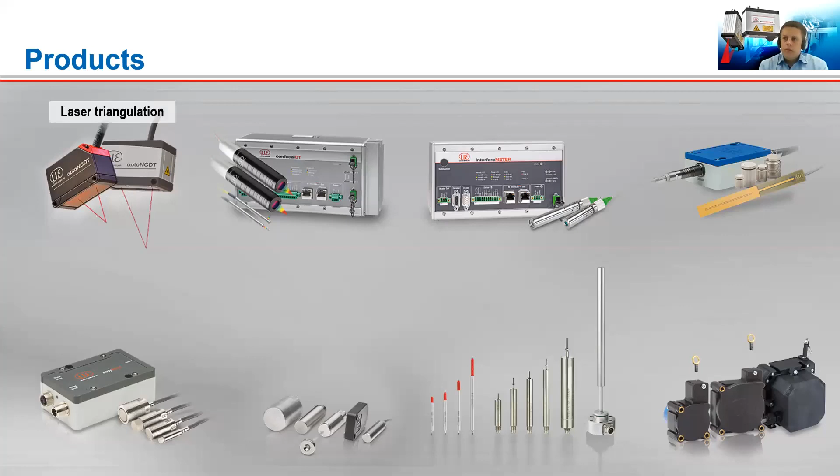First of all, the general product portfolio is not just about 2D, 3D laser profile scanners, but also about different kinds of applications and sensor technologies based on, for example, laser triangulation. Today we will talk about the 2D laser triangulation sensors. We also have them in one dimension.

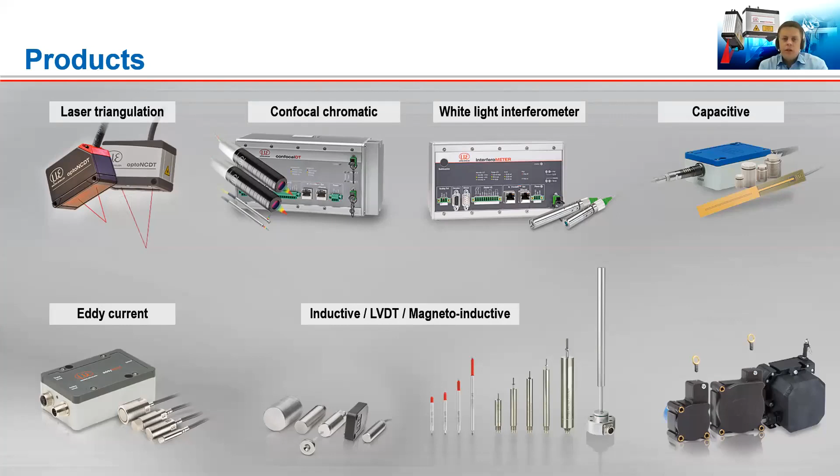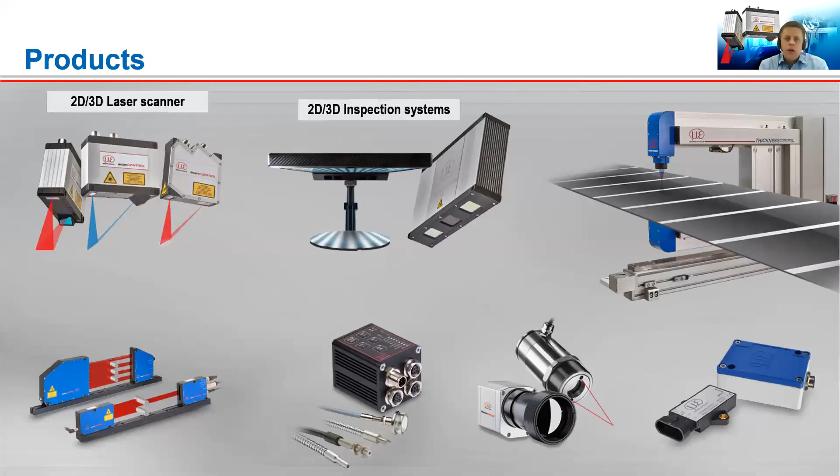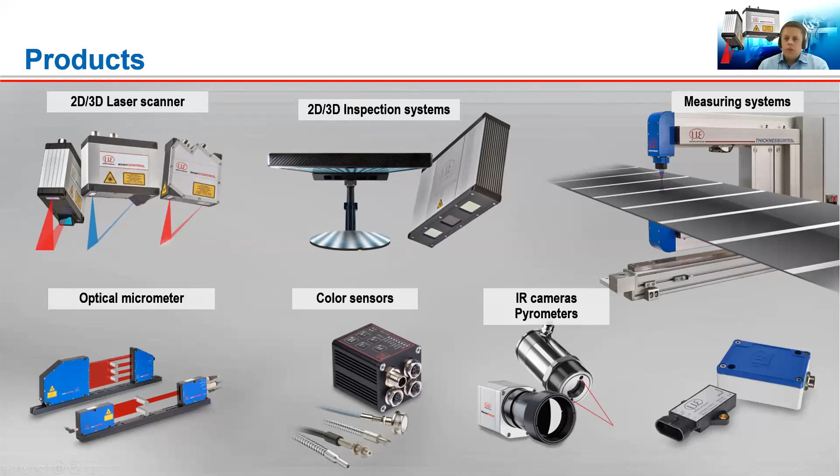Confocal chromatic sensor systems, white light interferometers, capacitive sensors, eddy current sensors, inductive LVDT magnetoinductive sensors, draw wire sensors, and also the area we will talk about today: 2D, 3D laser profile sensors, 2D, 3D inspection systems, measuring systems, optical micrometers, color sensors, temperature sensors. Mainly, today we will only talk about 2D, 3D laser profile sensors.

In general, due to the variety of sensor technology in our portfolio, we also have a lot of different applications and industries we are addressing, from automotive with big German car manufacturers to aerospace, so Airbus, Boeing, Bombardier. Automation, heavy industries, semiconductor industries, and smartphone industries. So in general, a huge variety. We are not just specialized on one industry sector, but different sectors.

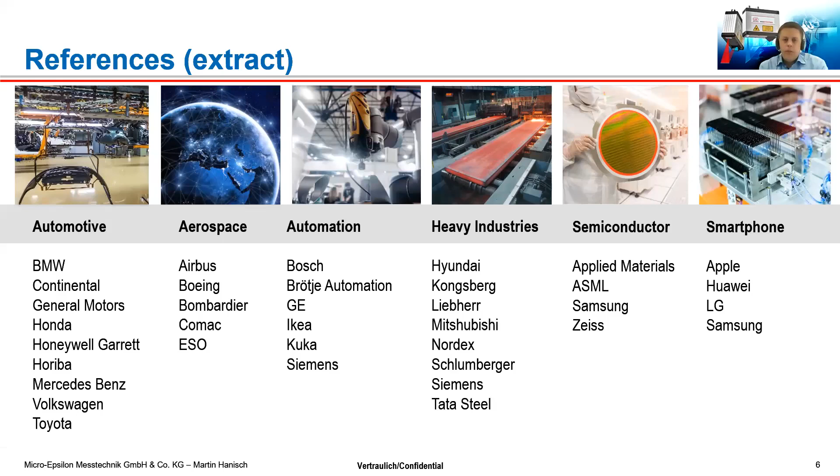And of course, we are also working pretty closely with universities, research institutes, and so on. We are also ISO 9001 certified. So it is mandatory for us to show all the documents, processes and products in our ERP system, so that it's easy to have an overview of the projects.

Besides that, we can develop according to special requirements like ATEX, ultra-high vacuum, aviation, and so on. Overall, we are pretty engineer driven, and this is a benefit in our case, since in most cases the sales guys are also engineers.

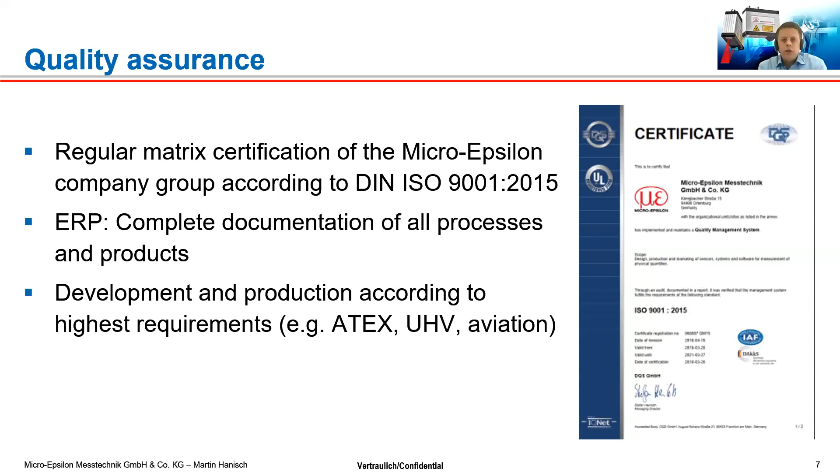First, I will start with some general applications that are solved with Micro-Epsilon sensors. Later on, we will focus on the laser profile scanners. General applications are, for example, the position measurement for the world's largest mirror telescope, the E-ELT. In this case, the mirrors need to be adjusted with a resolution in the nanometer range, so that the mirrors are focusing on the detection area. And of course, they need to be extremely temperature stable.

Besides that, with the inductive sensors, measurements are continuous and non-contact, for example with very robust sensors that are resistant against oil, diesel, pressure, temperature, corrosion. The bearing gap in marine diesel engines, for example, on ships.

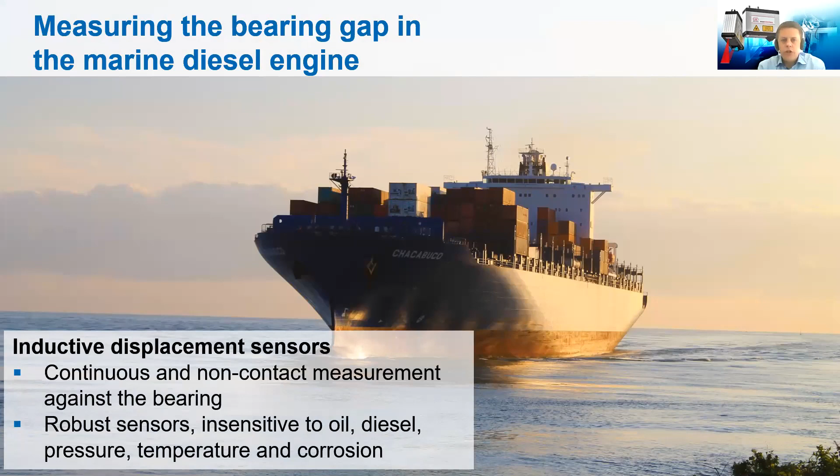Or, for example, condition monitoring for turbines and heavy electrical equipment with eddy current and capacitive sensors. That means these sensors can be built into the bearing directly to monitor the run-out of the turbine. They are pretty resistant against magnetic fields and, depending on the technology, also against oil, etc.

Another application, I think fully equipped with our sensors in the meantime, is the flap position and door lock control for the Airbus A350. This is really a serial sensor, and due to that, we also have the approval for aviation sensors with their special needs and special certification. This is also done by us.

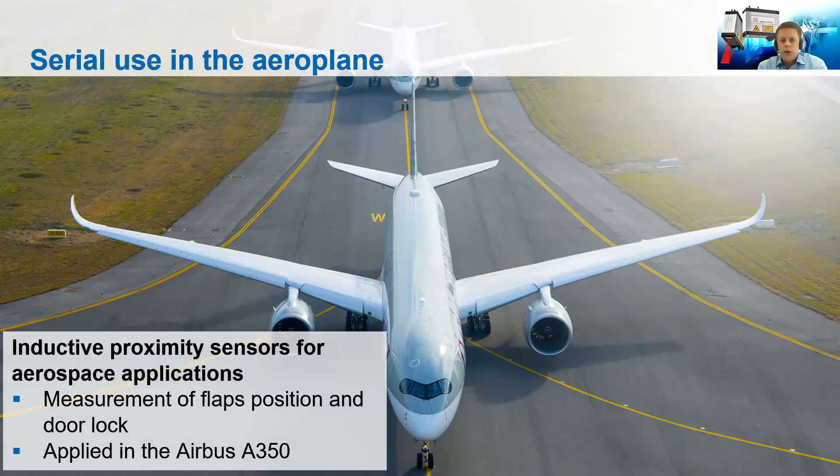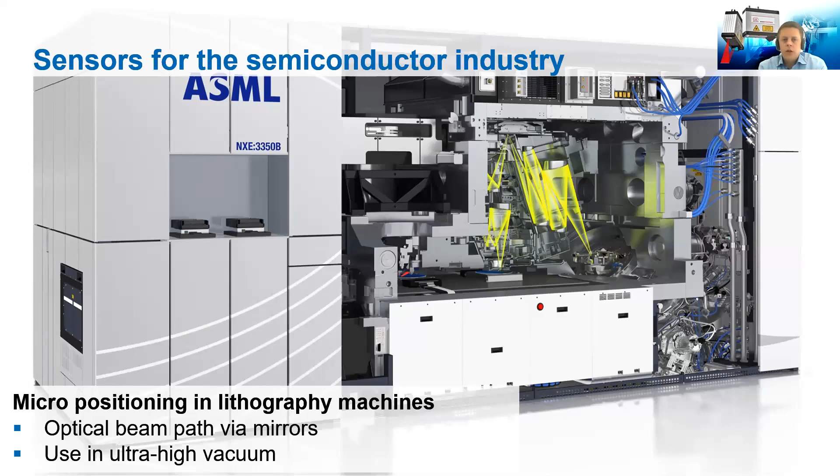That was mainly the general overview for the beginning. Now I will focus on the main topic for today, which is scanCONTROL. This is our name for so-called laser line triangulation sensors. Laser line triangulation is a two-dimensional measurement. So you're not just measuring one distance, you're measuring several distances depending on the type of sensor.

The sensors shown here have an X resolution of up to 2048 points along the X-axis. So you can measure about 2048 distances. They can be used from simple setups up to very complex systems, but I will show you applications a little bit later.

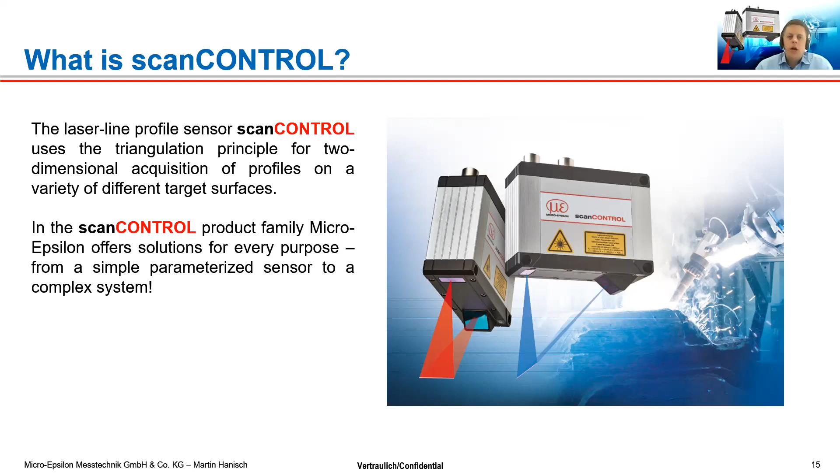A little bit of physics to begin. As I told you already, we are talking about laser line triangulation. A complex word, but in general, not that hard to understand.

You will have a laser diode. Laser diodes are only point light sources. Then you will have an optics, the laser optics, that will create out of the laser point a laser line. This laser line will be emitted towards the surface.

On the surface you will get a reflection. The diffuse part of the reflection will be going through the optical path, through the receiver optics, through a mirror, then on a detection matrix.

So here you can see this will be the laser line on the target. It is a pretty easy target, more or less just a step. And this is how it will look like in raw data, the pixels directly on the matrix. Internally, it can be calculated that way, that you will have a calibration from the production side already. And with that calibration, you will get calibrated measurement results in X and Z.

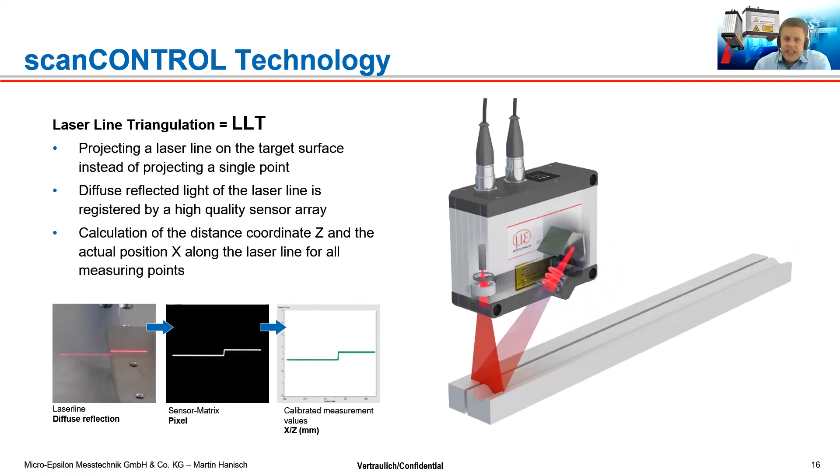Mainly we will have two classifications. One will be the compact classification as a group, let's say in that way. And the other one will be the smart classification. Compact will be to implement that into your own software environment, so you can code the software on your own. You're absolutely free to do whatever you want.

Smart sensors will be mainly used, for example, in the industrial environment, in the machine itself. You're not really interested in the raw data, but you're just interested, for example, in step heights, and this can be done with the so-called smart sensors.

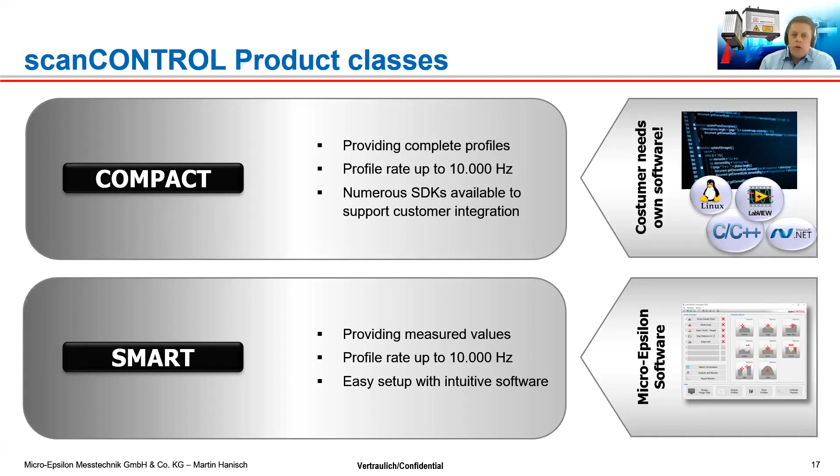Just to give you a general overview of what we will have, what will be there or not. This is more or less the current overview of our measuring ranges. You can see we have measuring range from 10 to 8 millimeters up to 200 to 300 millimeters. So in this range we are working, very small and very accurate, into more or less rougher environments, for example also to have a bigger offset in case of harsh environment.

Because in this case, also with harsh environment, it will always be good to have there, for example, a bigger offset just to get away from the target.

Mainly most of our sensors are available in red and in blue. This has something to do with the reflectivity properties of the sensors, because more or less this is always depending on what kind of material you have. In some cases red might be better, in other cases blue might be better. But this is something we can of course discuss directly on your topic. Will be no problem.

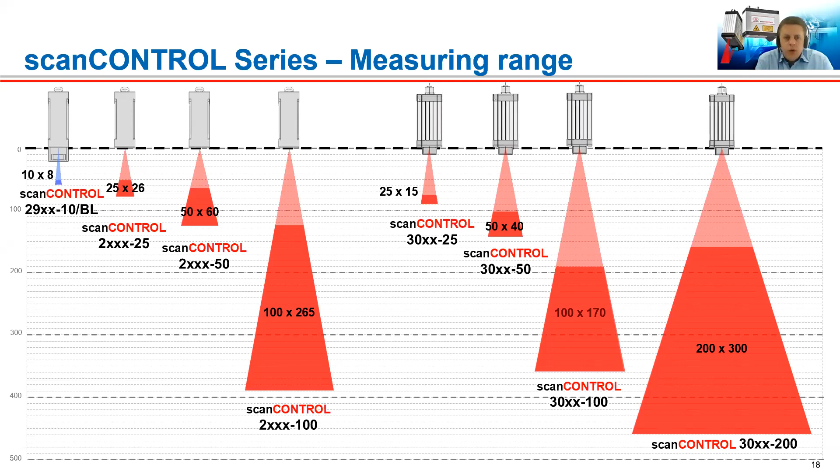Now we will show you a little bit about the software that we will have. So, software integration sounds a little bit boring in the beginning, but later on, if you want to, I can show you where you can get the software from, so you can play with that.

For the 2D evaluation stuff, more or less you can use our so-called scanCONTROL Configuration Tools software. This is the typical solution for the smart sensors. You have the possibility to choose from several programs or predefined pre-setups, like from left to right.

Here you can find, for example, an edge. You can directly calculate step height, an offset plus an angle, a gap measurement, angle measurement, middle point of a gap, and so on. You can more or less arrange it in that way that you can directly click together your needs. You can use at the same time up to 8 programs.

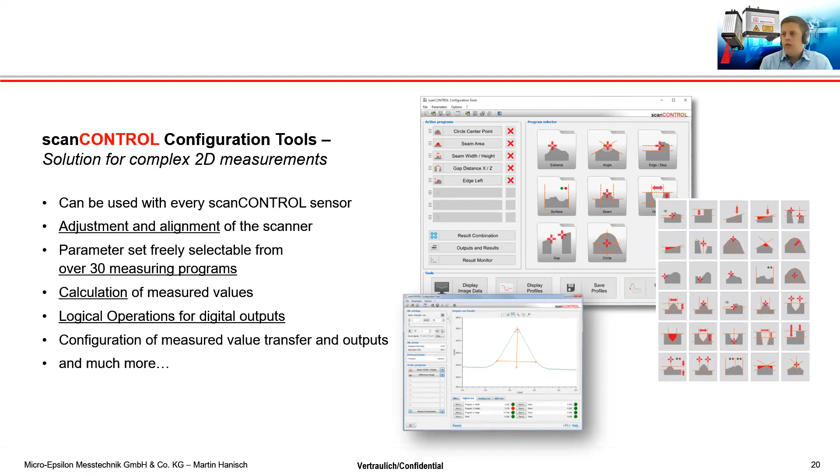Another software we have is the so-called 3D view software. With it, you combine several profiles out of the single profile software, creating a profile sequence. This profile sequence can then be used in combination to get very nice 2D/3D images, pretty images with nice color scaling.

Besides that, in the 3D view software, you can export the data in 2D as a computer-understandable grayscale PNG image, or in 3D as ASCII, STL, CSV, or PLY files. The ME3D PC file is one of our own formats to merge this data in the future with other internal software tools.

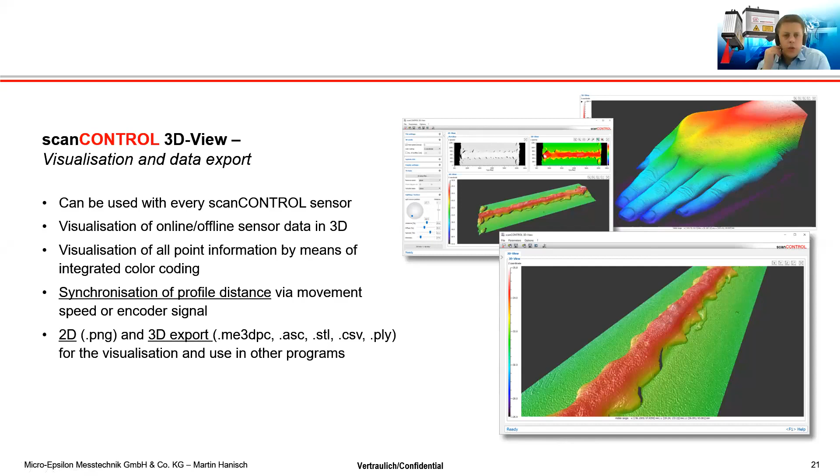Of course, as always with our software, we cannot solve every application. On one hand, this is a possibility because you have very complex inquiries or special needs, or especially in research areas, you really want to work on the raw data due to scientific requirements. In this case, we can provide the SDK.

With the LLT.dll and the SDK, you can implement the sensor with C, C++, C#, .NET, or LabVIEW—we have the instrument driver—or Linux. Of course, due to the correlation or similarity of different programming languages, other languages will also be possible, like Python.

If you have something special, feel free to ask, and we'll check how and if we can support other programming languages. But let's say the integration for the C family, LabVIEW, and Linux is more or less ready to use directly from the homepage, with examples in different varieties.

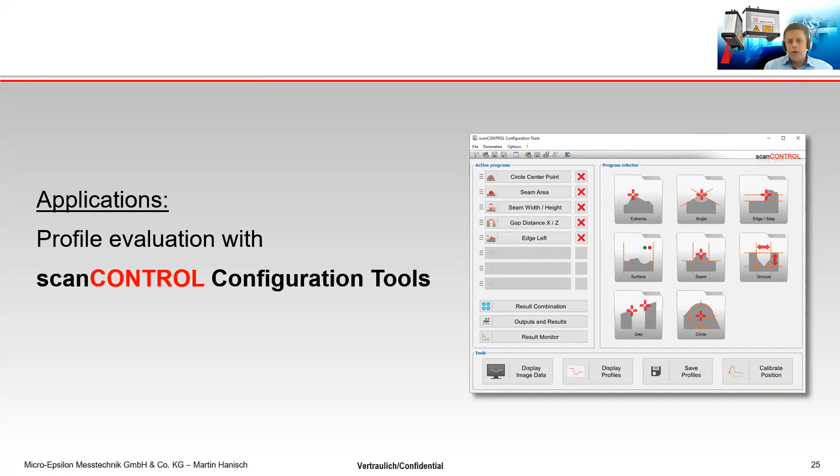This one was done with the scanCONTROL 3000 series, 3010. I skipped a bit of the detailed options here, because I think it might be too theoretical and also too early at this point. Of course, we can always help there, or we can discuss your application later on.

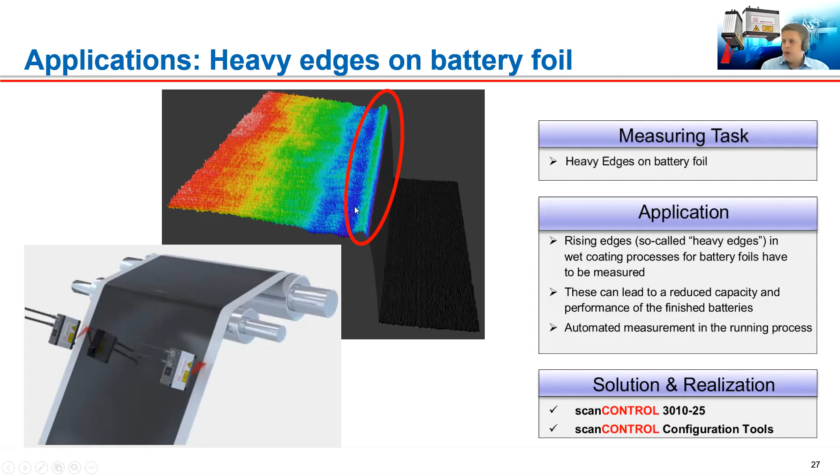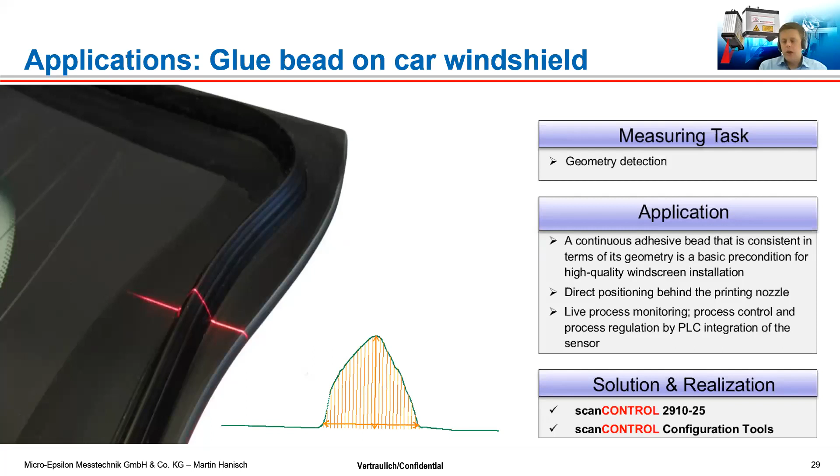So this is something like a typical application.

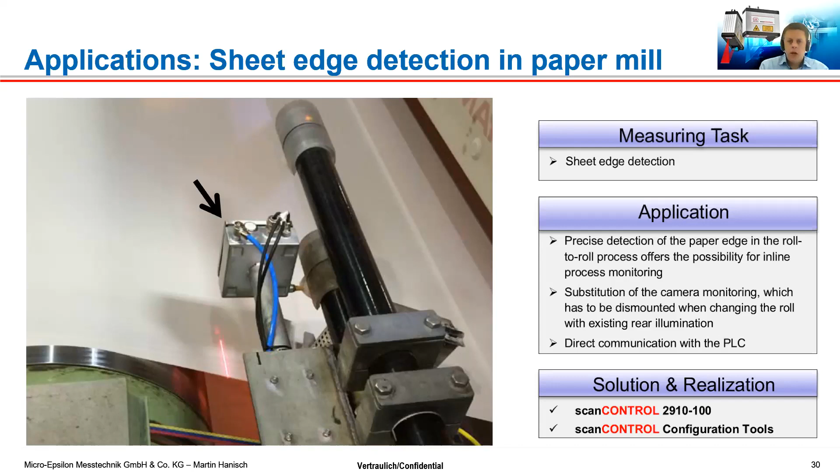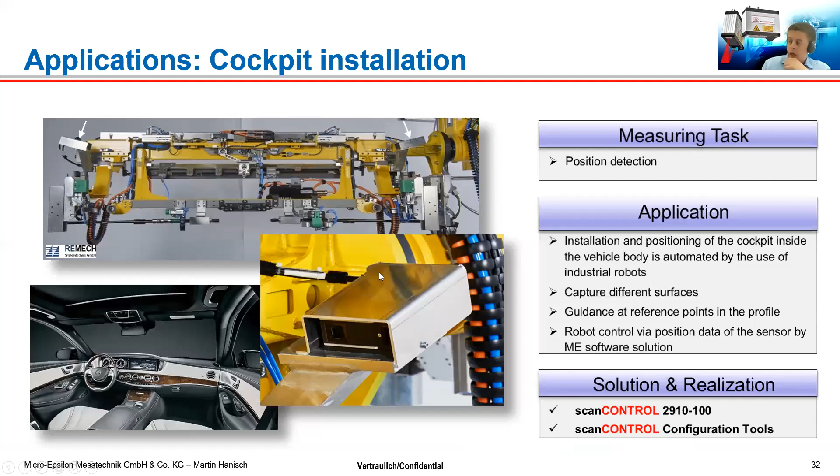So this is just a rough overview of what is possible. Of course, much more is possible, also with a configuration tool and the 2D evaluation. But we need to limit it somehow, not to get too deep into everything. With our software and evaluation on the sensor head, this one communicates directly with the PLC.

Now we are going to either more complex applications, or research institutes that often code their own software to have the possibility of checking everything in detail. As I told you before, for example C, C++, C#, LabVIEW, Microsoft .NET, GigE, Python, Linux. This will be an example.

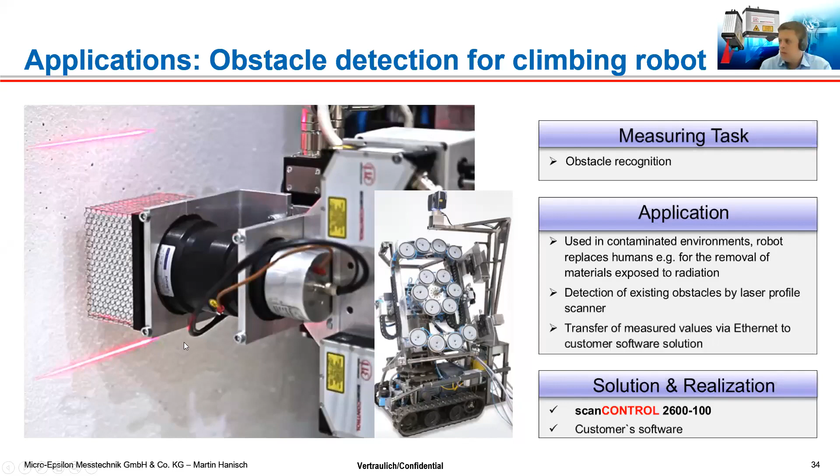And if you're milling something down, you should check how high you can go to avoid damage. In this case, they used two sensors, even if it looks slightly strange in the presentation. These are two red scanners, in front and after, to control against collision. So this was one of the possibilities.

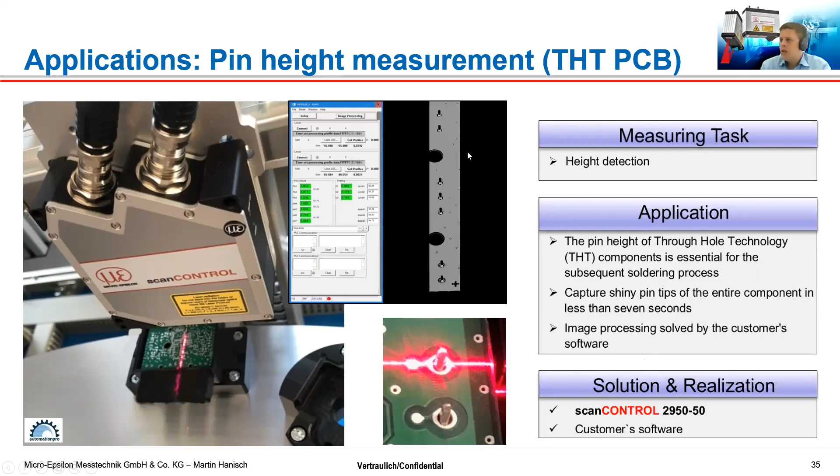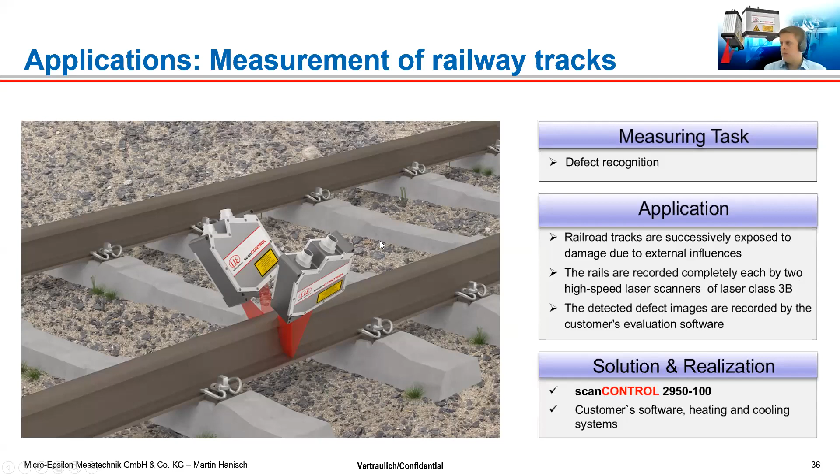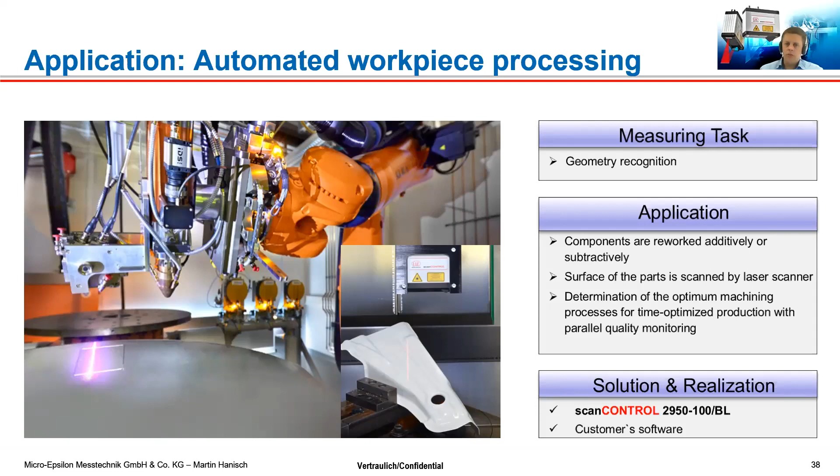Looks pretty similar, but the application before was slightly more complex, because this one will be only in one direction.

This is automated plasma cutting. So in this case, they also digitalize the geometry and the position of the object. In this case, it was for tanks, I think for food tanks mainly. And they have digitalized the interesting area and used the position.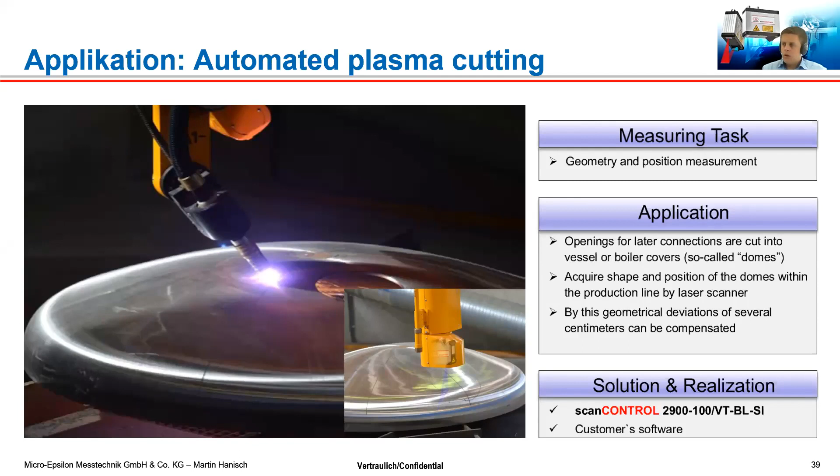And then due to the 3D data, the customer was able to move the plasma torch pretty accurately, so that on all sides there will be no problem. And here they're getting a proper and good cut. Yeah.

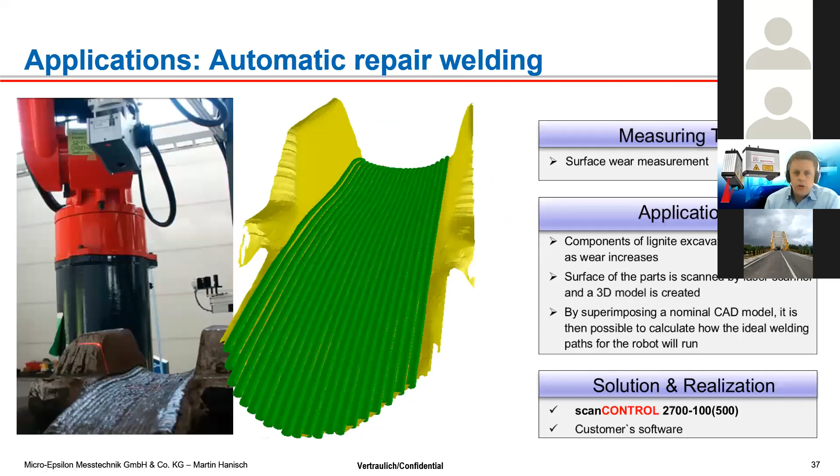Just give me a second. I will just search for the drawing. It was somewhere, I just need to find it. So give me a second. It will be easier with the...

Of course, for example, if you go to the bigger measuring ranges with 200 to 300 millimeters, even if they have the bigger matrix in this case with 2048 points, the resolution will be lower. Of course, it would always be nice to have the biggest measuring resolution, measuring area, and highest accuracy. Unfortunately, this is always impossible.

The third question was about output format. In general, it always depends on what kind you need, what kind of sensor you want to evaluate, and how you want to evaluate it afterwards. For example, with the 3D software, you can directly get the point cloud out as STL, CSV, ASCII file, and then it's up to you. So there's a huge variety, and it's up to you how to go on in this case.

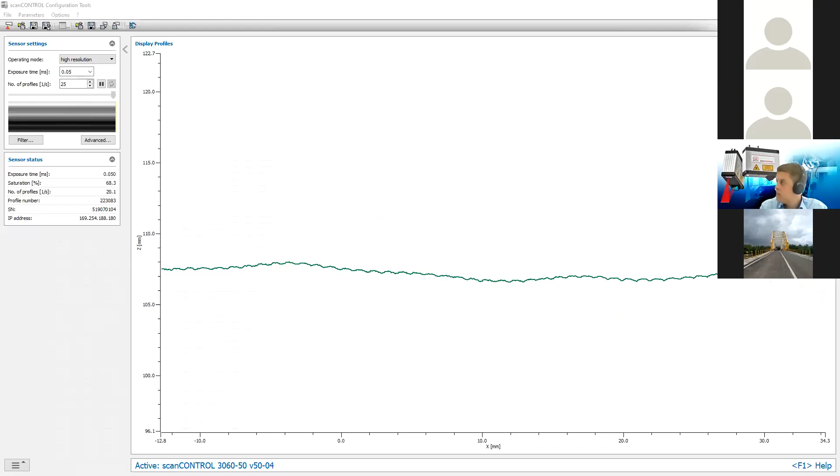There was another question from Sigit regarding the software tool. Maybe we can also do a live demonstration of our software. Yes, we can. Also there are some hands raised. I'm not sure, is there any question? Okay. What do I have here at the moment? I will just set back everything. I have connected to my PC a scanCONTROL 3060-50. It's just a 50 millimeter measuring range.

Iqbal Mutaquin, sorry if I spell your name wrong. Of course, you can change the direction. It's always a question what you're actually doing. In general, it will be possible. The direction is not fixed. Of course, you have to either move the sensor or the target, but the sensor itself doesn't care about that.

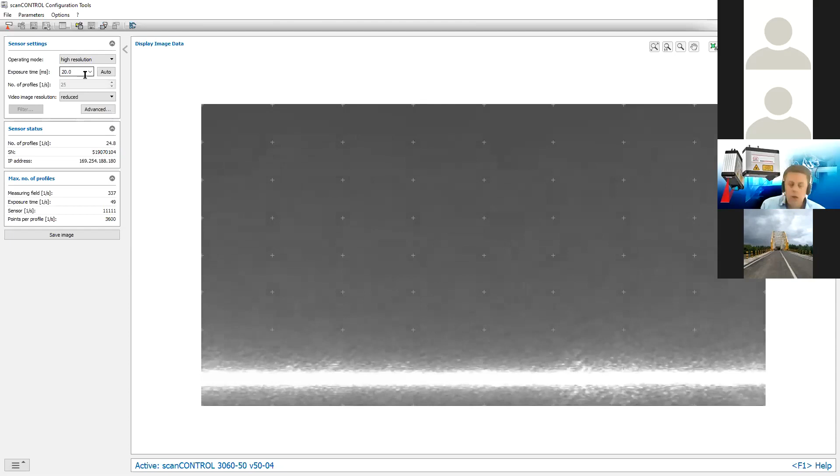What we are seeing here is the display image data. If I'm overexposing here, this is my finger. Of course, for an evaluation you always want to have a straight line. A straight line is always nice. And now, for example, I'm putting in here just a ruler, and you can see there's now the step here. Of course, this is the raw data. Now, from the raw video image of the sensor itself, we can go to the profile itself. Well, I have not really adjusted anything at the moment.

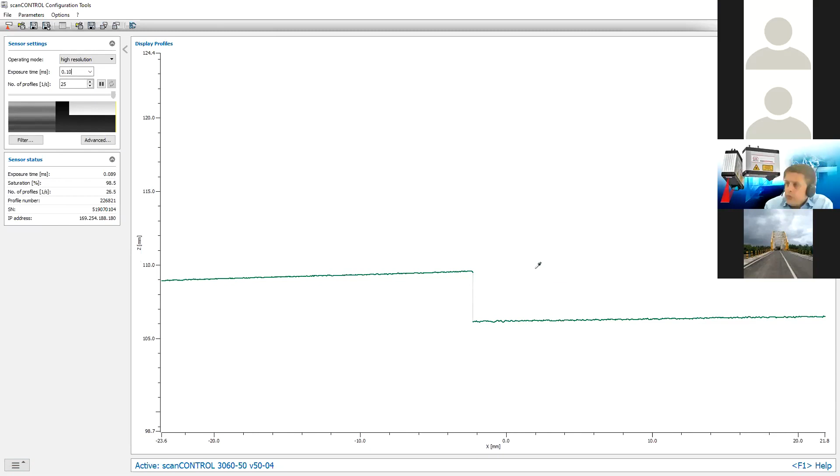And for example, in this case, we need to adjust it in a proper way. Of course, there will always be some smaller changes, small variations will always be there, always happening. And of course, we always try to get a more stable result.

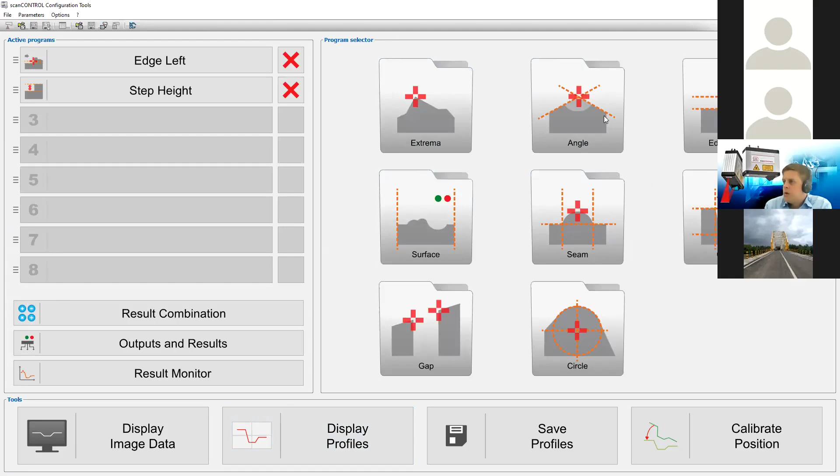So we will use a different angle. In this case, I will say, okay, I'm searching for an edge. Why I've used edge left - left means I'm using just the searching direction. Edge left means I'm searching for a direction from the left side. Choose the algorithm, I'm searching for an edge down.

All the points between the two vertical lines will be used to create an average line. This one will be here, this red line. And in this case, you can see you can set a threshold that will be parallel to that. And here we go, here we found the edge.

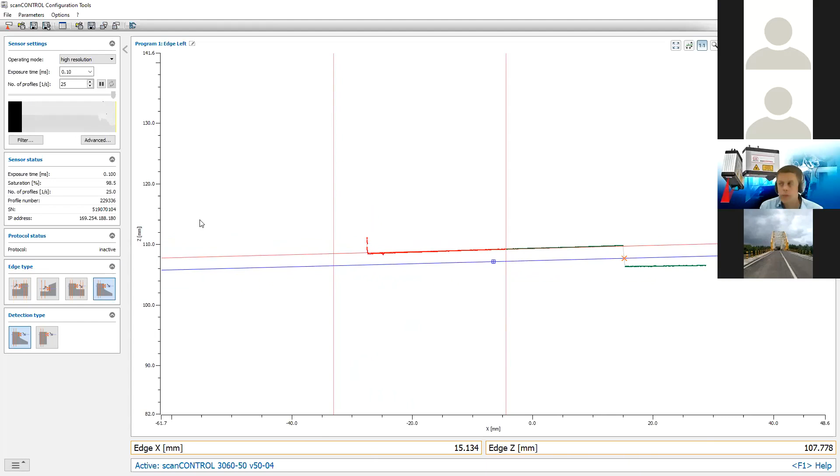So this will be one possibility. And then, for example, we can also measure the height about that. So again, set a reference line. And here we say, okay, now we are having a height difference of 3.6 millimeters.

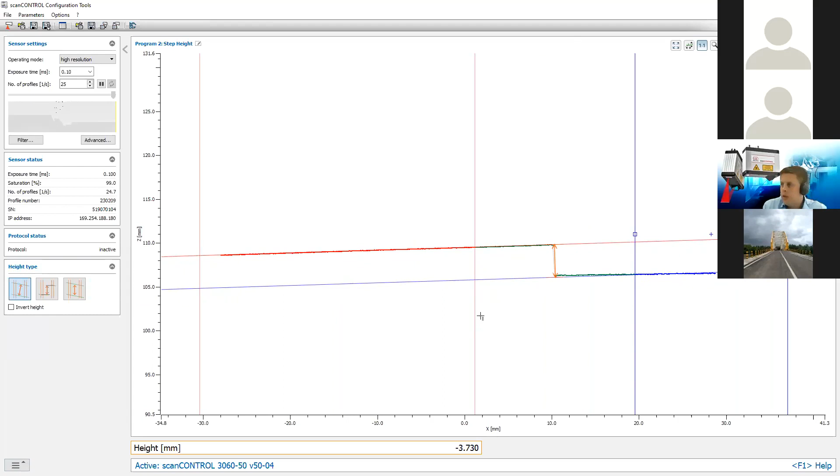What you can see is, for example, that they are not aligned totally parallel. So that means, besides the offset, there will also be a difference in angle between these two lines, on my table and the ruler. Pretty similar or same setup. And now you can see, for example, that they are not parallel aligned, so there will be about 1 degree difference between these parts.

There is then again the question from SKF about 3D scanning and building information modeling for facility management during the operation phase. Please keep in mind, general 3D scanning of buildings or construction sites will normally be done with the time of flight 3D sensor, because the measuring range will be much bigger. I hope I understood your question in a way.

Nevertheless, during, for example, the construction of wind turbine towers, there is one major application to use the profile scanners, because they are built out of concrete. And of course, for the building up process, the concrete is not really that accurate in all dimensions. So that means these concrete parts need to be milled down to specific values, and to adjust the machine and recheck everything. This can be done with the laser profile scanner.

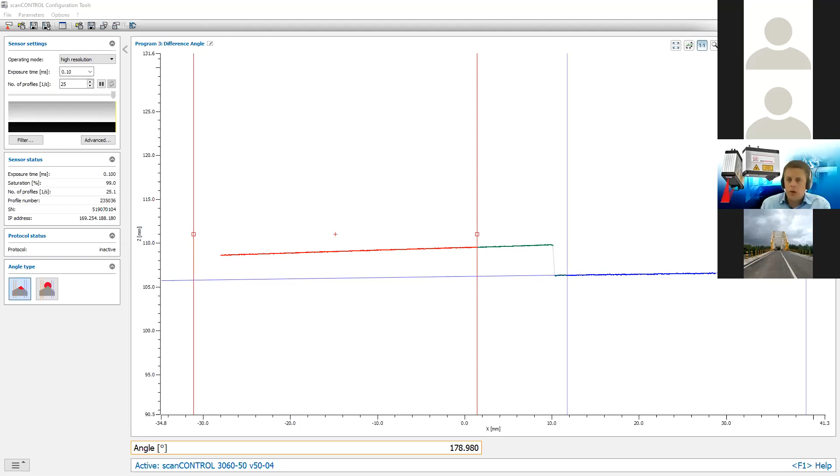Besides that, I can't show it to you now online because I don't have a moving axis with me at the moment, so I can only show it to you offline, especially because there was a question regarding 3D applications.

Please be careful, again the question from SKF about atomic force microscope, confocal laser scanning microscope - we are talking about both of them being totally different technologies. They are not really comparable with the laser line triangulation principle. Of course, with those you can get a much higher accuracy, as well as with atomic force microscope, as well as confocal laser scanning microscope. Be careful, because confocal is again a different technology. Confocal chromatic is normally based on the chromatic aberration of white light on lens groups.

Again, different technology. We are working here more or less on the rougher technology for the triangulation principle. The benefit will be that it is faster and also has bigger ranges than the microscope testing, and in automation it will often be faster, but less accurate than microscope technologies, unfortunately.

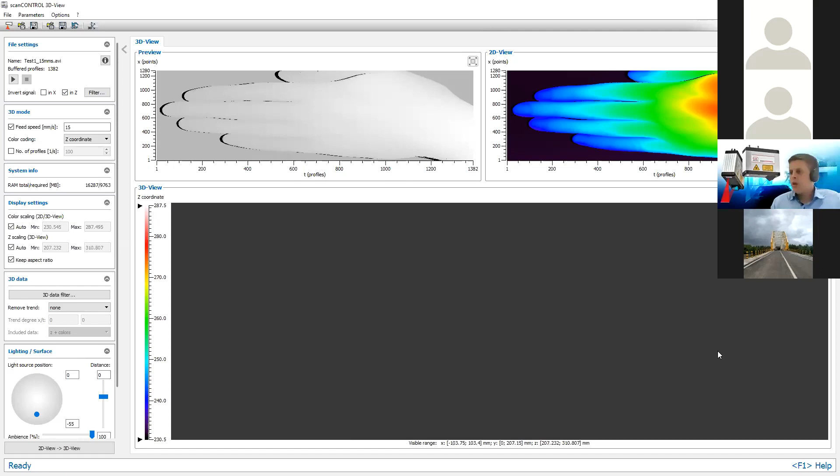Like I told you, or I showed you in the picture, for example, this one was a scan of my hand. Still, the scanner I have used in this case was...

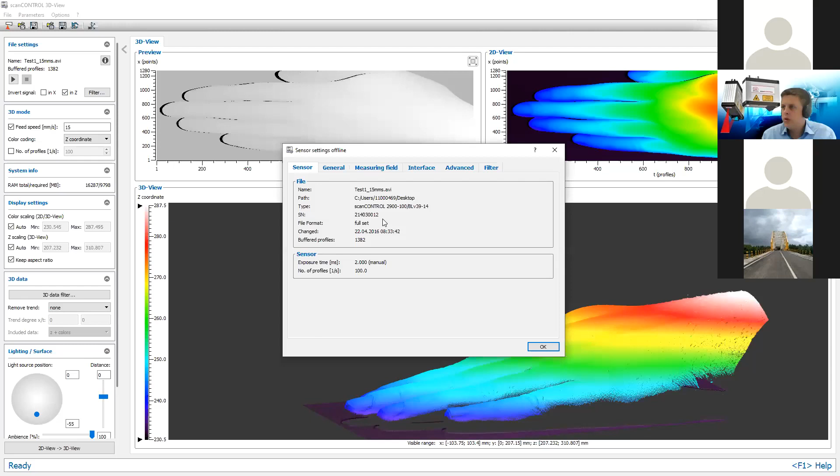My fingerprints, and so that's why I just scanned the backside, and here you can still see more or less also some scratches on my hand. Let's just check there, I think it was the left hand. Yes, it was the left hand, I think so. At the moment, but I don't see my scars.

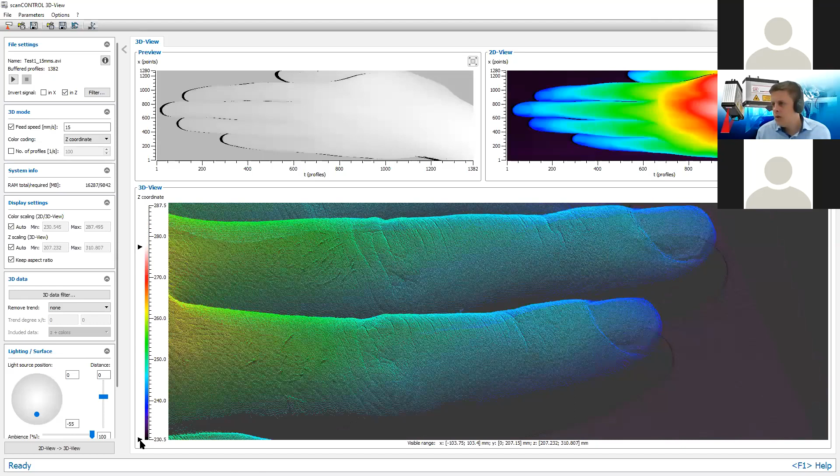Yeah, hard to say, more or less, maybe you just need to change the color coding, of course. And due to the change of the color coding, more or less, you can also make some other things visible or not visible.

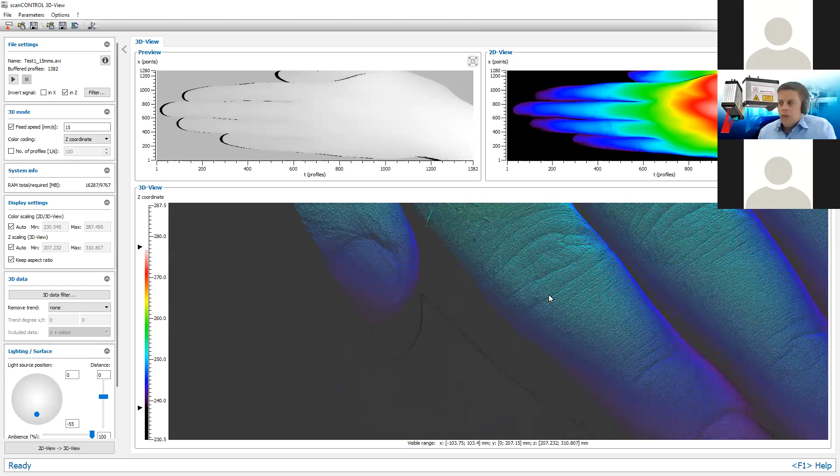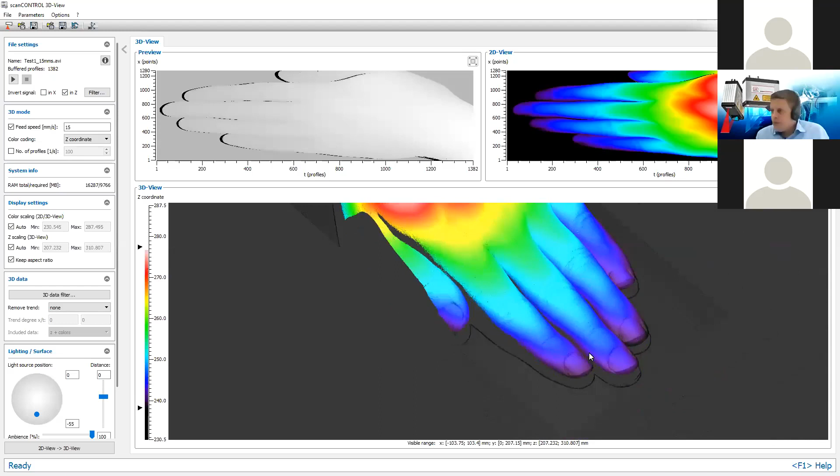It was an inquiry, a general inquiry, how such scanners will behave towards organic material, human material. There are some inquiries in the medical industries to scan meats or different kinds of meats and so on. This was just, that's also why I've used more or less my parts in this case, so my hand, just to show how a scan of a human body part might look like. So not a specific application in this case, nothing in detail. I think it was a medical application in the background, but I'm not so sure anymore, and I probably would not be allowed to talk about that.

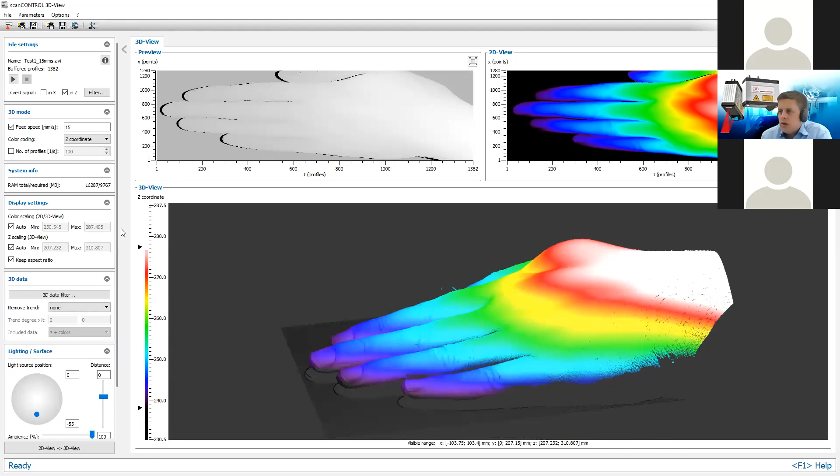Yes, there is, to be honest. This is more or less, of course, something I can adjust. You can see here on the left side the scale of the Z coordinates. And of course, I can lower the RGB range and increase the area, or I can also change the color coding, for example, to grayscale and so on. So this is just a different way of showing or displaying the height information.

Options, I can export 3D data in this case, and then I can say, okay, I can export it as ASCII file, step file, binary step file, ASCII CSV, PLY binary, or PLY ASCII. So in general it will be possible, but direct implementation in CATIA is not possible, because there you will need the step in between - for example, going through this area or through the software, recording the data, and then doing an afterward export.

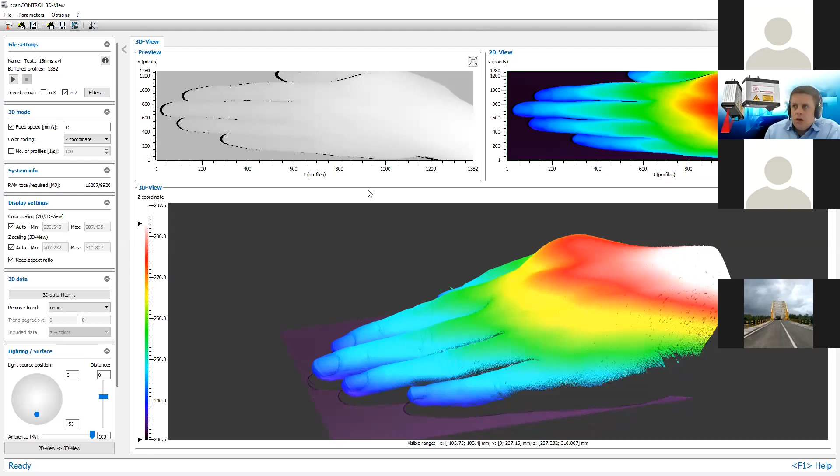Normally, if I use the colors here, it was going from white to blue. The brighter it is, except yellow, it will just be a reference towards the height information, but it's just a color coding. Of course, you can also use different kinds of codings. For example, in this case, the brighter it is, the higher it will be, but it's just an illustration question. So yes, there is a dependence, but always in different ways. So hard to say.

Maybe a last question. Could the laser sensor be used on any kind of material surface? What are the surface material limitations for both blue and red sensors? Mainly due to the fact that we are working with reflections, real transparent glass, for example, will be a problem. But this is from my experience. It will look different if, for example, the glass is coated. If there is a coating on the glass, the reflection properties will change quite a lot, so it will be possible.

In general, you can say for organic, semi-transparent, and transparent materials, a blue laser line will always be better because blue, from the physics, has a smaller wavelength, so it will be reflected earlier than red. And due to that, for semi-transparent, transparent, or organic material, I would recommend blue. For other materials, like normally metal, red will also be fine.